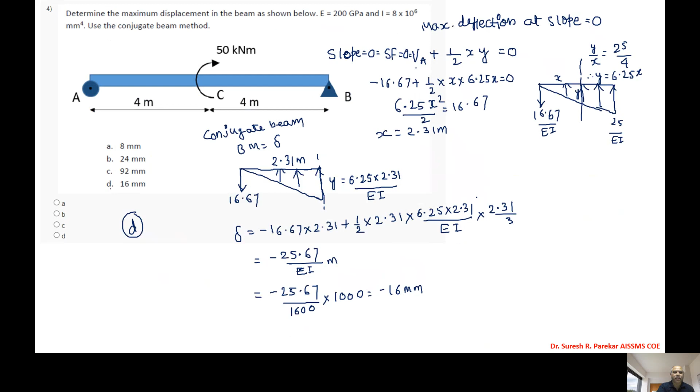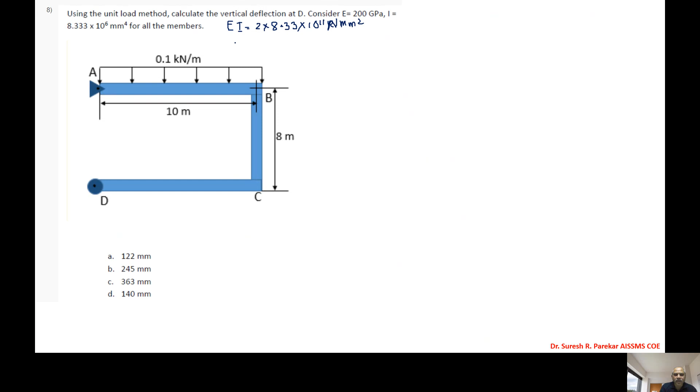Now we are with assignment 5, part 3. Already we are with problem number 7 and now we will go with problem number 8. So now here we have to calculate the vertical displacement at D. EI is given here. So EI we will get it as 2 into 8.33 into 10 to the power 11 Newton mm square, and that gives us 2 into 8.33 into 10 to the power 2 kilonewton meter square.

Now we will start, same as before: we have region, we have origin, limit, then EI is same, so I will not write it here, M and then small m. So first we will find the value of the reaction. We will have horizontal reaction over here, and UDL will give clockwise moment, so it should give anti-clockwise moment. So here we are in this way.

So now if we take moment about D equal to 0, we will have 0.1 into 10 into 5, and that I will say HA, so minus HA into 8, and that is equal to 0. And therefore we will get value of HA equal to 5 by 8, and that comes 0.625. So this is 0.625 and this also is 0.625 because equal and opposite. We have vertical reaction here only, 0.1 into 10, that will be 1 kilonewton. Now we will start with first AB.

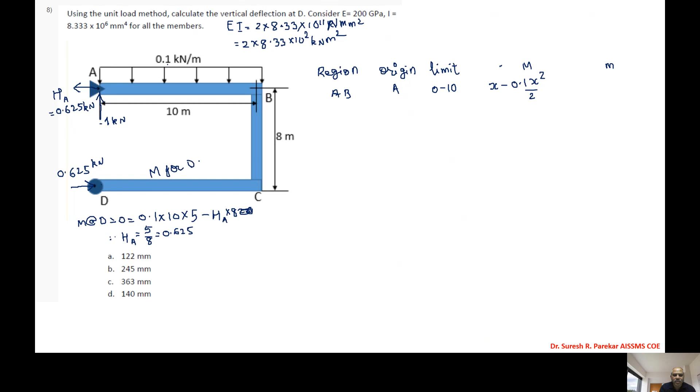This 0.625 is axial, will not be considered. Origin A, limit 0 to 10, value of M we have x minus 0.1 x square by 2. Then we will go with DC region. In DC region this is axial force, so M for DC region is 0, and therefore we need not consider DC region. Now we will go CB. Origin we will take C, limit 0 to 8, and moment we have 0.625 into x anti-clockwise, so plus 0.625x.

Now we have to find vertical displacement at D, and therefore we have to apply a vertical unit load at this point. So we have 1 over here, and then automatically we have 1 over here. Here we do not have any force. Now small m: in this portion we have simply 1 into x. In this case we have 1 into this distance, 10, directly 1 into 10 anti-clockwise, so this value is directly 10.

Then delta at D is equal to integration 0 to L of M into m dx upon EI. Now separate parts: first 0 to 10 x square dx upon EI, then minus integration 0 to 10 of 0.1 by 2 into x cube dx upon EI, and then the last term plus integration 0 to 8 of 0.625x into 10 into dx upon EI.

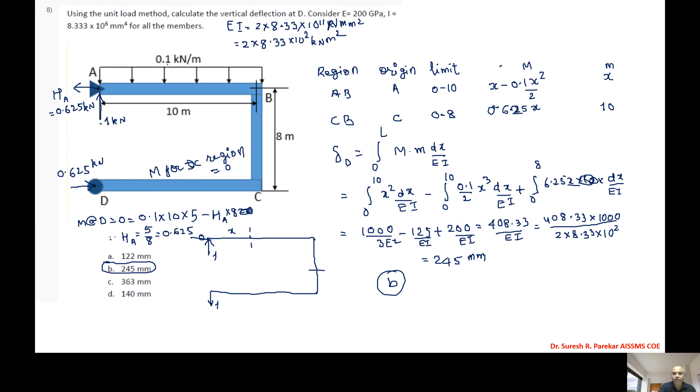Then we have the ninth problem. In this we have to find out displacement at A. First we will find the reaction. We take moment about C equal to 0: minus 1/2 into 25 into 10 into 10 by 3 plus RB into 10 equals 0. From this we will get RB; the 10s get cancelled, and 1/2 and 10 get cancelled.

So we will have this as 10 into 10 giving 250 divided by 2, and then we will get RB. So half into 25 into 10 into CG, we have 10 by 3, plus RB into 5, not 10, because this distance is 5. So 5 2s are 10, 10 gets cancelled, and we will have 250 upon 3. We are taking moment about C, and therefore it should be RB into 5.

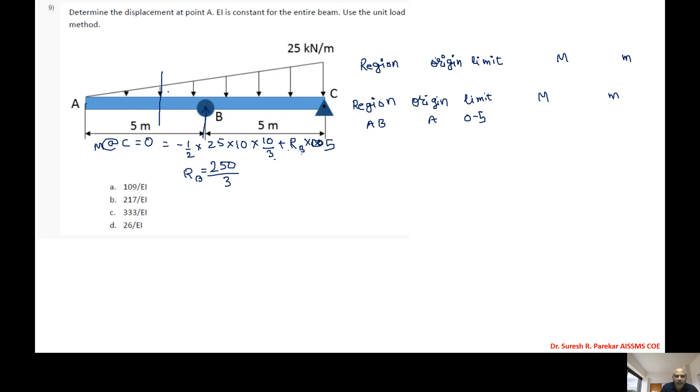Then region first we have AB. Origin A, limit we have 0 to 5. Now what will be our value of moment? So we will have this as y, and this is x. Then we will have y by x equal to 25 by 10, and from this we will get y is equal to 2.5x. And then what will be the bending moment? If I consider this triangle, I have this value as 2.5x, and this value is x.

And then we have Mxx equal to 1/2 into x into y into x by 3. And then we will get it as 1.25 into x cube upon 3, or 2.5 x cube by 6, one and the same thing. So I will get it as 1.25 x cube upon 3.

And then we have the second region, which will be BC. Origin we have B, and limit I will put as 5 to 10. Why am I putting 5 to 10? So that this equation will remain as it is; there is no change in the equation. So this I will get as it is, 1.25 x cube by 3. And then due to this reaction we have minus 250 by 3 into x. So this will be my value of M.

Now we have to find out small m. We require displacement at A, so we will apply 1, and from this we will calculate RB. We will take moment about C equal to 0, and from this we will get RB as 2. And now small m, in this region we have 1 into x, so that is x. Sorry, in both cases x is from here, the origin is A, and therefore we have taken 5 to 10.

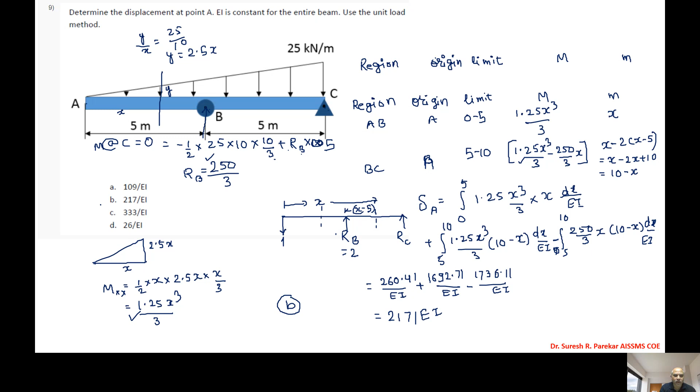And then we have the last problem: the bending moment diagram of a beam is shown in the figure below. Which option is the correct support and loading for the beam? So now it is very clear. Here we have simple support, and here we have UDL. In this case, as we have bending moment 0, here we have roller support.

Now which will be the correct option? So this will not be possible. Then we have concentrated load; this also not possible. This also not possible. This is cancelled because we have fixed end moment, and here the value is 0. This is not possible because we have concentrated load. This is not possible because the moment is going up.

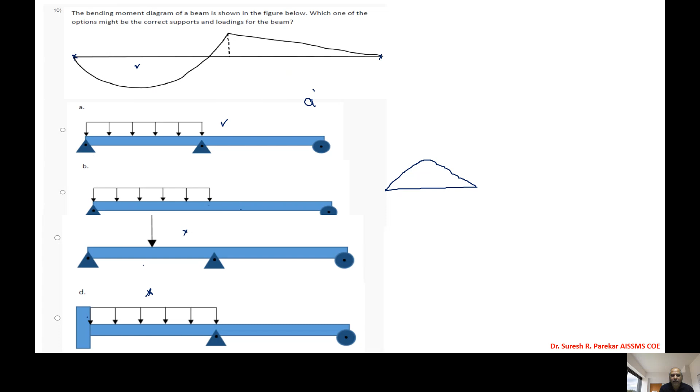And therefore we will have this as a continuous beam, because if we go for this, then our bending moment diagram should be in this fashion somewhere here, and then it will be like this. So we will have option A because this is continuous. So likewise we have to solve the problems.